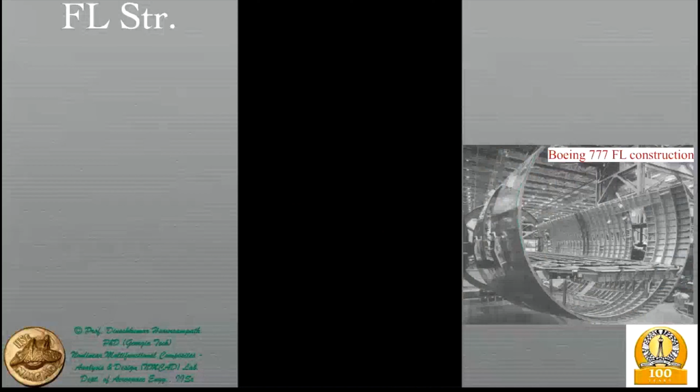Of course, there's the skin all around. It could be a single skin for smaller aircraft, but as aircraft become larger, especially the A380 or the Boeing 777, it's made out of multiple panels joined to each other. Depending upon the material, the joining technology varies. Older technologies were more in terms of countersunk rivets, whereas now it's more adhesive joints and/or rivets in combination. Again, it depends on the specific materials utilized.

In addition to the cover skin, you see elements running along the length, similar to the wing, which we call stringers and longerons here, especially if they run almost through the entire fuselage. Here you see smaller ones, the typical stringers. They need to be cut out, for example in this case because of a door, or somewhere else because of a window. So these stiffening elements running in the longitudinal direction become shorter.

Apart from these longitudinal stiffeners, you have the transverse stiffeners, an example of which is the frame. Some of these frames, especially where the wing is attached, could be much larger compared to other frames because of the larger loads coming in from the wing there. In addition, apart from these frames, you would have much larger transverse stiffeners in the form of pressure bulkheads, typically at the rear and front end of the fuselage. So let's look further.

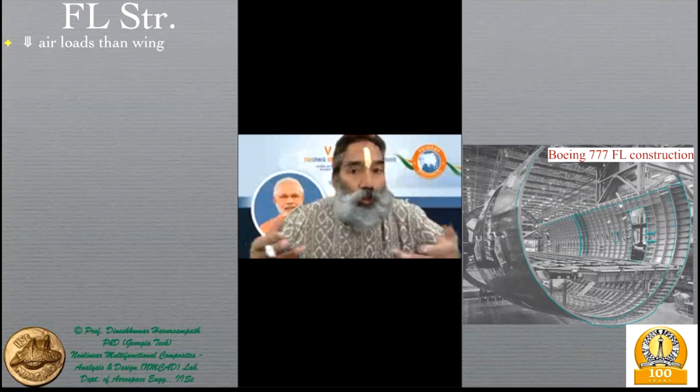It could be in the belly part, the bottom, or the sides, or somewhere on top. Wherever it is, it's basically local air pressure coming in, and there are two sets: one from outside, the other from inside. The inside pressure is substantial, especially for passenger aircraft flying at higher altitudes, as is the case with most commercial aircraft, so that's a substantial load.

The air load from external airflow, because the aircraft is moving through the air, is much smaller than on the aerodynamic surfaces. So the primary loads—the second being internal pressure for passenger aircraft—mean that in terms of geometry, the most efficient configuration is a circular cross-section. As you see with the Boeing 777, it's almost circular, or at least close to an oval configuration in most situations.

But in addition to internal pressure for passenger aircraft, all aircraft have concentrated forces coming from the fairings that attach the wing to the fuselage. In some cases, the wing runs through the cross-section of the fuselage as a single structure; in others, it's joined at a particular location through fairings, which becomes a very critical location.

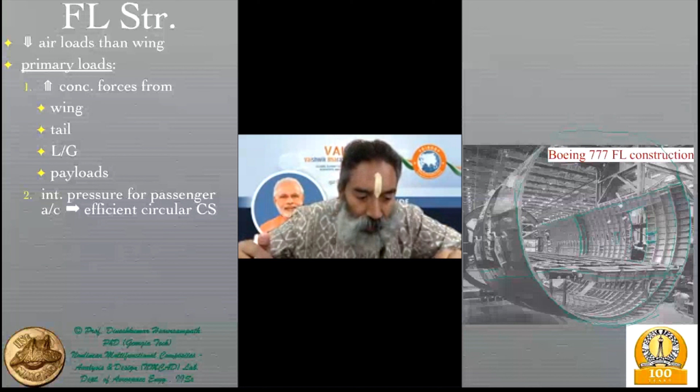As we said, the wing is like a cantilever beam with a distributed load, and at the root it suffers the maximum bending moment and maximum stresses. Therefore, how it's joined to the fuselage is very critical. A concentrated force comes from the wing there, and at the rear end this might just be the central fuselage construction—here you see a much larger frame, probably near where the rear engine is attached, for example.

Not in this case, but in other cases, it could also be where the empennage is attached. You would want that, but of course, there will also be a rear pressure bulkhead at the rear end as well. So from the tail, there would be concentrated forces where the tail is attached to the fuselage.

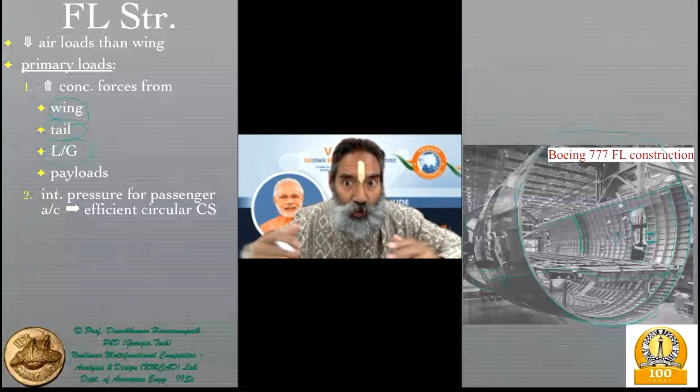In addition, the landing gear, especially the nose landing gear, because the rear landing gears are usually on the wing, unless you have a very small aspect ratio wing and a large fuselage, like going more towards a blended wing body, in which case you would have it on the fuselage as well. But in most situations, you would have the landing gear loads coming both on the wing and on the fuselage. So here we are focusing on the fuselage.

Then, of course, there is a payload on top of this floor beam as far as the people are concerned in a passenger aircraft, but there's also a lot of cargo in the bottom portion over here, and that is also causing a load.

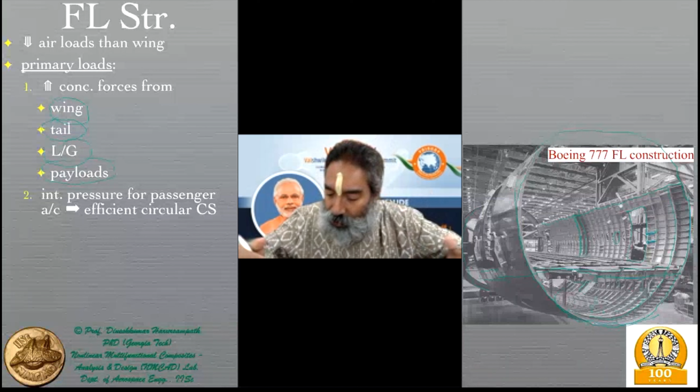So the floor beam is a very important structural component over here, and the choice of materials and geometry becomes important. The geometry is dictated from it being flat for the movement of passengers on top of it and the location of the seats, etc. So in terms of shape, you might not have much change, but where it is located in terms of height, there you would have some leeway.

Again, it depends on maximizing the room for the passengers, at the same time having enough room for the cargo volume to occupy the bottom portion. In addition to the cargo volume, you would have many other connections, electrical connections, control connections, etc., running through below the floor of the fuselage.

So therefore, essentially, we might give names to each one of these in terms of the cover skin, the stringers, longerons, frames, and bulkheads, etc. But essentially, it's nothing but a thin shell, which means it's a 2D element, which we have looked at basically as a shear panel.

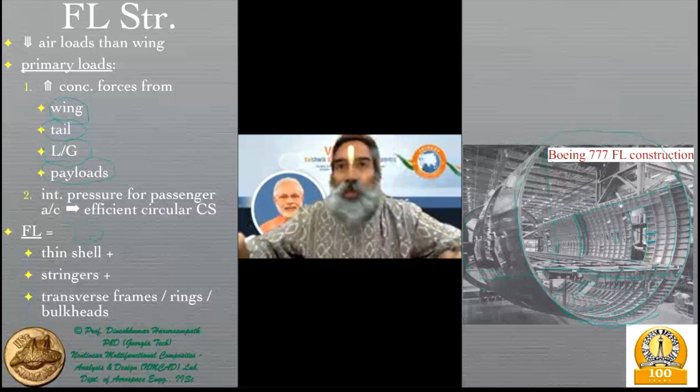So a 2D element, which is your shear thin shell, and then your stringers, which are essentially 1D elements, and the transverse frames are also essentially 1D elements because their cross-sectional dimension is very small compared to the overall length of the frame, which is basically the circumference of the fuselage itself.

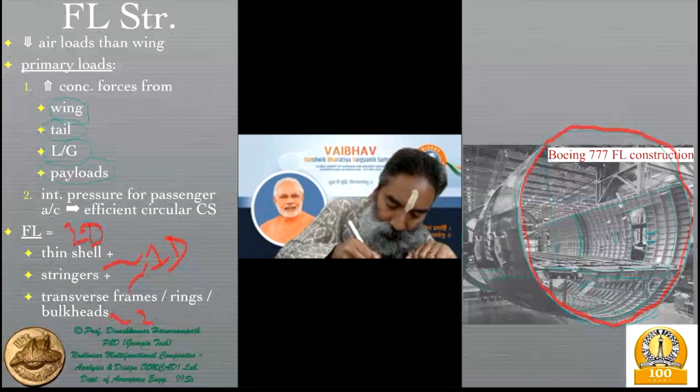But if you look at the bulkheads, they are more in terms of a 2D configuration, very similar to the transverse ribs that you have in the wing and horizontal and vertical tails. So you have two kinds of transverse stiffeners, some of which are 1D, some of which are more like 2D.

So then let's look at each one of these elements. The skin, as you know, carries, just like any other 2D element, predominantly the shear stresses. Again, the shear stresses could be due to multiple reasons. There could be torques. Why could the torque be?

Because let's say there's an engine attached here. The weight of the engine is going to act at a location, or through a center line, which is different from the center line of the fuselage. So there is a moment arm that is there. So this length times the engine weight could be acting on that.

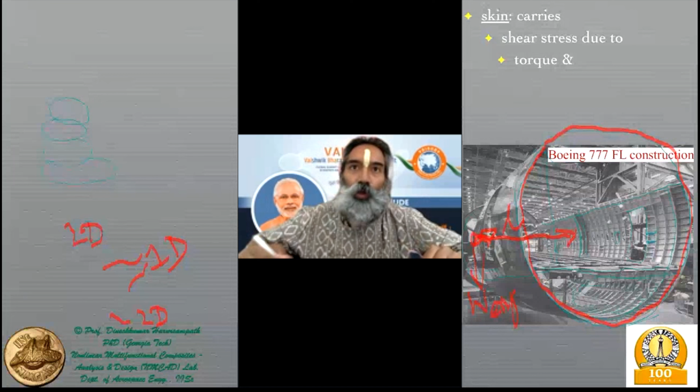Similarly, whatever is the lift distribution which is coming at the fairing over here is again acting at a location away from the center line. So that will cause a torque, but it's not throughout because it's going to be balanced by what is coming from the other wing.

Unless the aircraft is performing a roll maneuver, in which case you would basically put the aileron down on the right side, the starboard side, and on the left side, the port wing, you would have it up, and therefore there is less lift there and more lift on this side. Therefore the starboard goes up and the port side of the wing goes down.

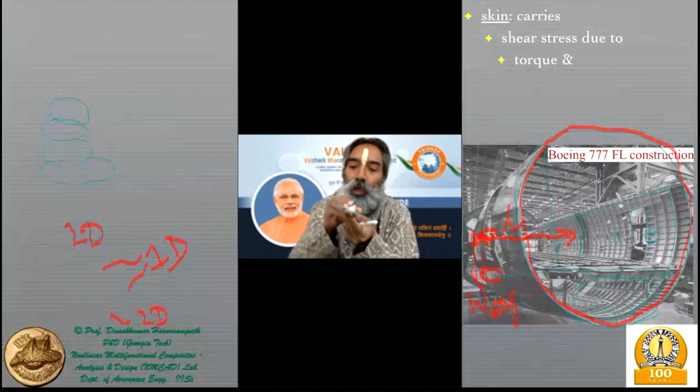This is a nomenclature typically used to distinguish the right side as the starboard and the left side as the port wing. In such situations, you would have a little bit of torque coming from the differential lift transmitted from the wing to the fuselage. But if you look at the horizontal tail, you'd never have a differential there. It's only from the wing that you could have a differential like that.

Also, at least a part of it is experiencing a little bit of torque, because this weight, even when it is a symmetrically loaded structure, causes some kind of transverse shear acting through it, and that transverse shear has to be accounted for in any case. So the second source is the transverse force, and more often than not this is the larger of the two, something that needs to be taken into account even more than the torque. But it's the combination that is important under different flight phases.

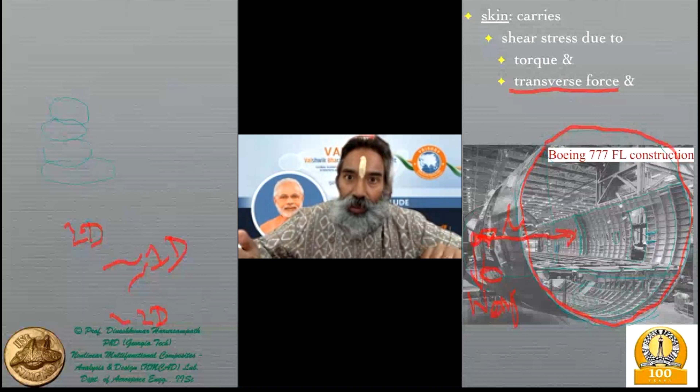Then the skin also takes the hoop stresses due to internal pressure, as in a passenger aircraft flying at higher altitudes where the external ambient pressure is very low. You can't survive at such low pressures, but of course you do not provide atmospheric pressure at sea level, which would be too expensive - one, from the structural point of view, because the design would require a much thicker skin, and also a thicker skin means larger weight and the efficiency of the aircraft comes down.

So typically you will have an internal pressurization at a certain altitude, and again these are specified by the certifying agencies and are strictly followed.

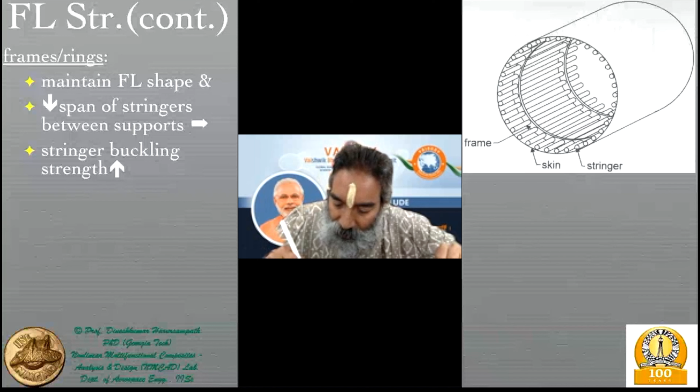Continuing with the fuselage structure, more in the form of a schematic shown in the figure, these are the three main components: the skin, the stringers or longerons, and the frame or bulkhead. We just saw the role of the skin already, so that is taken care of. Now we will look at the frame, ring, or bulkhead.

This essentially performs a function analogous to the transverse ribs in the case of the wing and stabilizers. There it was maintaining the aerodynamic shapes, the airfoil shapes, cross sections. Here it maintains a circular or near-circular cross section of the fuselage, so that the volume or cross-sectional area it's designed for is more or less maintained under all flight phases. So it's to maintain the fuselage shape.

Then it depends on the pitch - the distance between two adjacent frames. Let's call that pitch P. The smaller it is, the more it reduces the span of the stringers, so that even though it might be a longeron running all through, the effective length of consequence is just that P portion of length P.

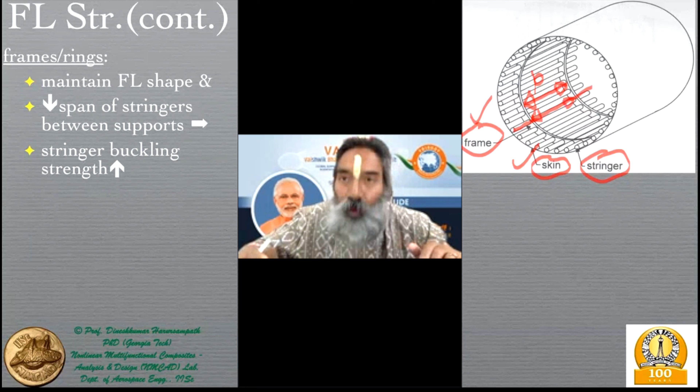So the transverse frames, by their very existence, reduce the span of the stringers between the supports, which means that those under compression - depending on the bending loads coming in, whether it's the overhang portion or the interior portion - the fuselage can be dealt with as a simply supported beam with overhangs on both sides, more on the nose side. Depending on that, mostly because of the self-weight and other loads from the reactions at the two supports - the wing and the tail - you get bending, and so some of these stringers will be under compression.

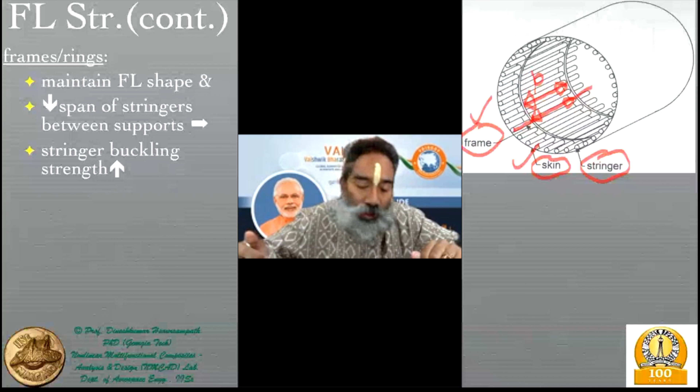So even when the aircraft is on the ground, just from the self-weight, you can see that the stringers on the top will be under tension, whereas the ones at the bottom will be under compression. The situation remains somewhat similar in terms of where the tension and compression is. So you would choose materials which are better in compression in locations known to be prone to compression, and vice versa.

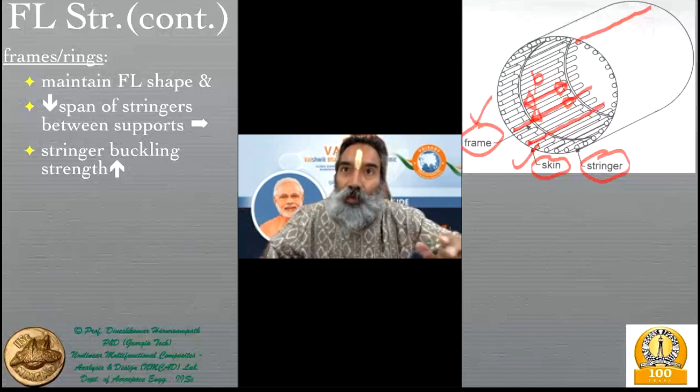The effect of the frame is in terms of increasing the buckling strength of these stringers, and therefore their instability is either postponed or completely avoided. Whereas the skin, even in the case of the fuselage, may sometimes be allowed to operate in the post-buckling regime, but more so in the aerodynamic surfaces than here.

On the other hand, the heavy bulkheads that I talked about, the front and the rear, close to where the cockpit is and close to where the empennage, that is the tails, are. These are typically much heavier, but once again they are transverse stiffeners, and these heavy bulkheads will especially distribute large concentrated forces, and that's why they are located in such locations.

We saw that in the Boeing 777 example, how the frame closer to where the wing is attached is much larger in cross section compared to the regular frames. These will distribute such large concentrated loads, which could be coming from the wing, the nose landing gear, the empennage, or if an engine is attached to the fuselage, as in the podded aircraft that we talked about in the previous class.

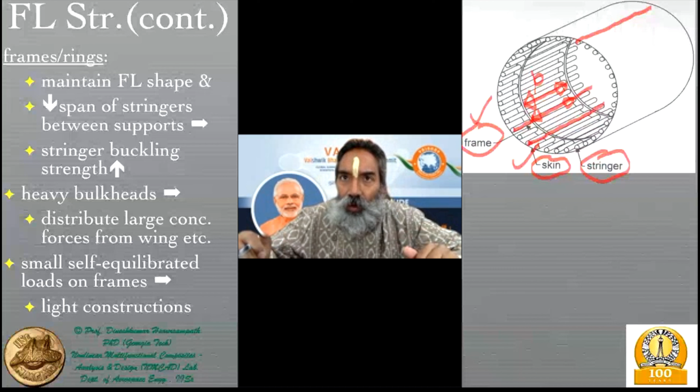In addition, most of the frames, not the bulkheads, are having very small self-equilibrated loads. The whole idea is to get the force or pressure from the air loads transmitted through the skin to the stringer, and from the stringer to the frame, eventually to be transmitted to the floor beam. And of course the reactions, that is the simply supported beam, is having a hinge over here and another hinge over here where the wing and the tail are attached. So it's basically transmitting the load to those locations through the bulkheads or frames that are over those locations.

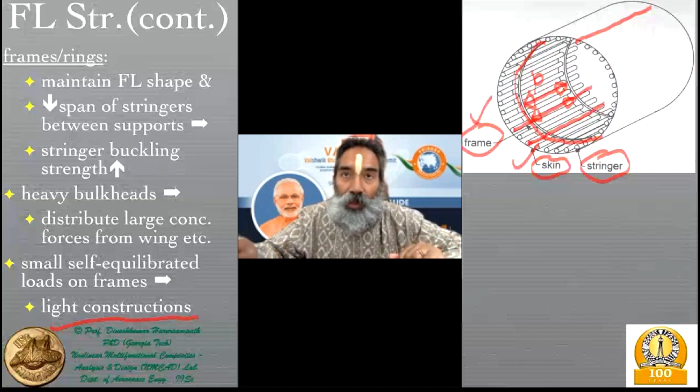Whereas the other frames, the ones you see in this schematic, are usually of a very light construction. In other words, the cross-sectional area is very small, and the material requirements are not as stringent as, for example, in the case of the stringer or the floor beam.

So then the final component over here is, we've already seen the skin and the frame. Now we will take up the stringer or the longeron. These stringers, as is evident in the case of the wing as well as the fuselage, carry the bending moment in the form of axial loads, because each of them is not actually under compression and tension individually to balance the bending moment, but they are operating as a team. Some of the stringers are under compression, some under tension, so that together they carry the bending moment.

So usually when we say a beam is under bending, you expect a neutral axis and portions in tension and compression, but that's not what we are talking about in the case of the stringer. Essentially they are like axial rods, primarily carrying axial forces, some compressive, some tensile.

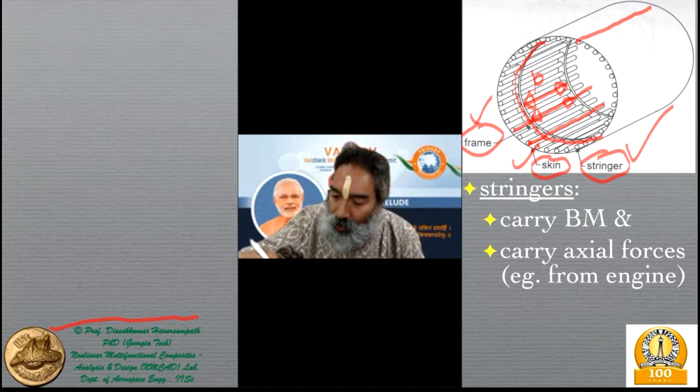And in addition, as we saw in the previous class, in the example of the podded aircraft where you have the engine attached to the fuselage, the thrust of that engine acts like an axial load. If the engine is attached somewhere over here, that thrust is also causing bending if it was just a single engine. But obviously you have engines on both sides, so it's not going to cause bending because of that—both sides compensate each other.

But if there is a single engine failure, which is why multiple engines are required, especially in passenger aircraft including business aircraft where this podded configuration is very common, once one engine is off, the other engine causes a thrust which not only causes an axial load in the stringers but also causes bending for the overall fuselage. Because of that, an additional axial load—algebraically speaking—is cast on the various stringers, depending on which side they are of the engine that is off.

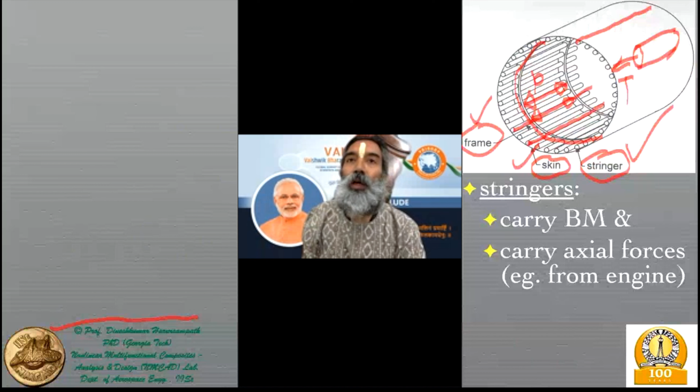So the next purpose of the stringer is also to stabilize the skin. Just like the ribs reduce the skin panel size in that direction, the skin panel size in the circumferential direction is reduced by the pitch of the stringers in the circumferential direction—that is, how far apart the stringers are.

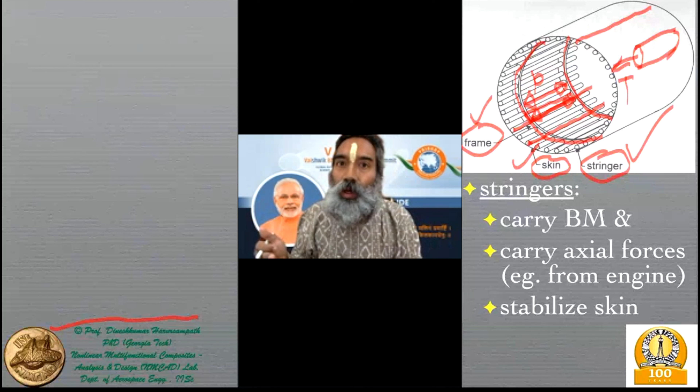That creates a small strip-like panel, which is what essentially takes the load, because once it crosses a stringer, it's able to transfer its air loads onto that stringer. So you don't need to consider the entire wing panel or fuselage skin, just that part of the panel between them. And that's why in many situations you can even have closed form analytical solutions which might work reasonably well, if you have, of course, estimated the loads with reasonable accuracy.

With this, we have completed our understanding of load factors, wherein we saw how the inertial loads in terms of the G factors, how many Gs the aircraft is flying at, versus the velocity, because that dictates the dynamic pressure. So we saw the critical design points on the flight envelope for which the aircraft needs to be designed. That was the flight envelope or load factor study, and then we saw the load transfer as well.

Now that we have done that, we have looked at pretty much all the fundamentals of the flight vehicle structure. So in the rest of today's class, we'll revisit the aircraft materials that we have already encountered earlier, and see what additional information we can make based on the classes we have had recently. Once we are done with that, we will get into the theory of elasticity, because we know we have chosen the material, we know what kind of structures they are, some 1D, some 2D. How do you go about analyzing them?

For that, we will set up the terminology and also put it into that bigger picture we formed of 4 categories of variables, namely loads, stresses, strains, and deformation, and the 3 sets of equations which relate them, namely the stress equilibrium equations, the constitutive law, and the kinematics, which relate pairs of these. Putting them all together, we arrived at either a 4x4 matrix, which is good enough, or if you want to compare with results of others, you can go for a 6x6 matrix, as we said.

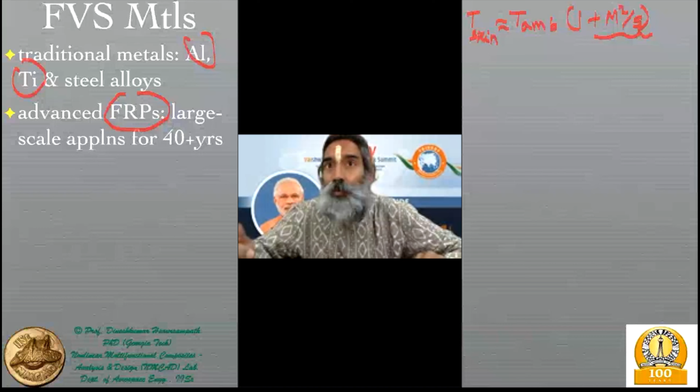Overall, the classic example is the SR-71. Another example is the Boeing 787, which went into huge time overruns. It's a hugely successful aircraft today, but in terms of deadlines it never met them, and in terms of cost of development it far exceeded initial estimates. Why? Because of the new technologies.

One is, of course, the composite materials that were involved in a much more extensive way. So here we are not only talking about development in terms of production and manufacture, even more so in terms of the maintainability, serviceability, and repairability. All these issues need to be taken into account when talking of materials.

It's essential that since these materials have been around for so long, we understand, even in the case of fiber reinforced plastics, the various issues associated with them. The typical life is about 30 years, even for commercial aircraft, so many FRP components might have already overrun that, requiring replacement and recycling. With polymers, especially the thermoset polymers predominantly used, lately there's been a movement towards thermoplastics, which could be a little better at recycling. So what are the recycling issues there?

If a crack or damage develops and a portion needs to be repaired, composite patch repairs are needed. At the damaged composite location, you typically cut out the area to have a more uniform shape, oval or circular, and then put a patch over it. Now, if that patch is too stiff or too less stiff, both can create problems because of the stiffness mismatch, and stress concentrations could arise there.

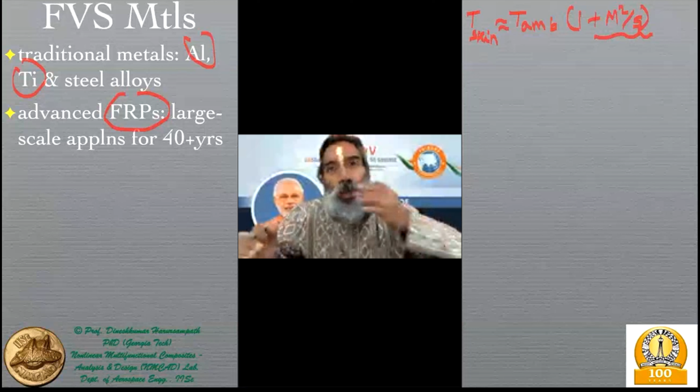Understanding all of these aspects, at least from a qualitative point of view, is required for all aerospace engineers, whether we specialize in materials and structures or not. This overall understanding is what I'm trying to provide through the information I'm sharing here. For those interested in pursuing it further, there are many different sources through which you can do so. The material selection criteria will depend on various things.

We have talked already about three very classic ones: specific strength, stiffness, and stability. Those are primarily looking at structural performance, but we need to look at cost as well. That's where you have the various kinds of cost - initial material cost as well as manufacturing cost, which includes various ways of manufacturing and joining it, because the entire aircraft is never made as a whole. You have so many parts which need to be joined, so those joining costs, and eventually the maintenance service costs.

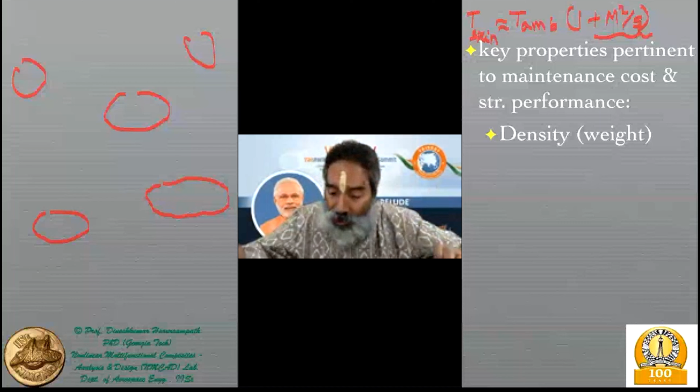So the key properties pertinent to maintenance cost and structural performance are these. One, of course, we have already seen density, weight. For example, even toughness - toughness is typically defined as the area under the stress strain curve. So if you have the stress, let me just do this: stress versus strain, let's say in tension, sigma 11 versus gamma 11, the 3D strains we're talking about.

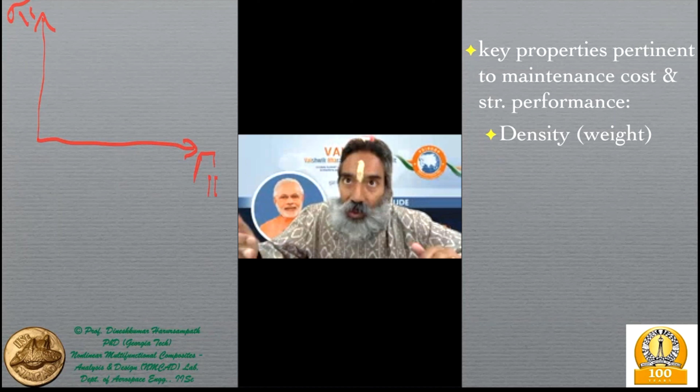Therefore, it's a property only of the material. Whereas when we're talking about the stress resultants, it becomes a property of both the material as well as the geometry. So here it's a purely material property.

We know for various materials like composites, it could be brittle - it's just a fracture over there. So we are basically talking of the area under this curve, whereas for others which have a nonlinear portion, yield, and then could have strain hardening in terms of true stress, and in terms of apparent stress the stress level comes down. But essentially what we are seeing is at some point there is a failure, and whatever is the area under that curve is giving you the energy per unit volume.

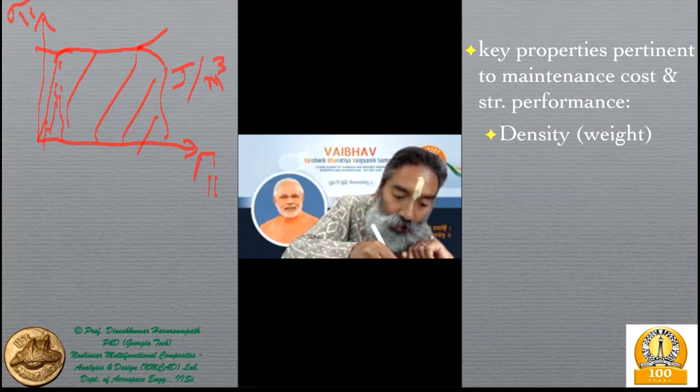But again, it's not that which is critical for us. In that case, you have to divide by the density again, just like we did for the specific strength, the specific stiffness which is the slope of this curve, and also in terms of stability, the E by rho cube that we talked about. So in all those cases, there was a division by density or some power of density involved.

Similarly, in terms of toughness also, this gives the amount of energy stored per unit volume. But again, what you are interested in mostly is energy per unit mass. So you would have to divide that area, whatever area is there, by rho in order to get the fracture toughness in a per unit mass kind of thing. Because for a unit mass of weight that you're using - that's the weight penalty we're talking about - how much energy is it able to store, more from the point of view up to fracture.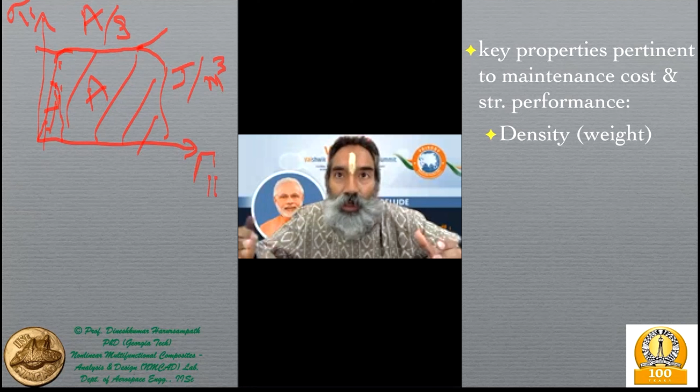So therefore, in components which are designed to absorb those energies, just like in the case of a car, you have the bumper and front portions which are supposed to deform in order to absorb the energy of the impact. Similarly, in the engine, you have a containment structure that needs to absorb the energy. So these kinds of things need to be designed from a per unit mass basis rather than just this area alone. So do keep this in mind that A by rho becomes a critical thing. Density is not only important from those three parameters we already studied, but this is another example where density could play a role.

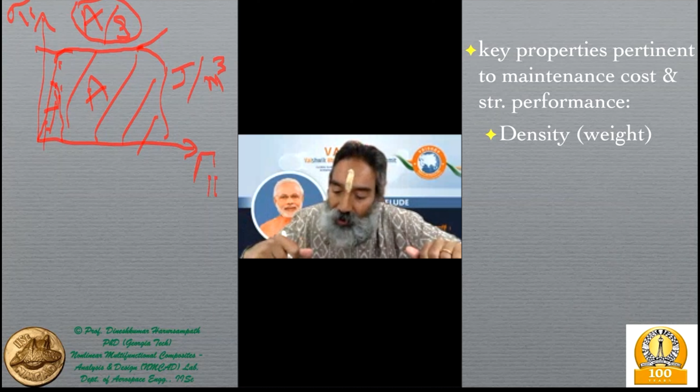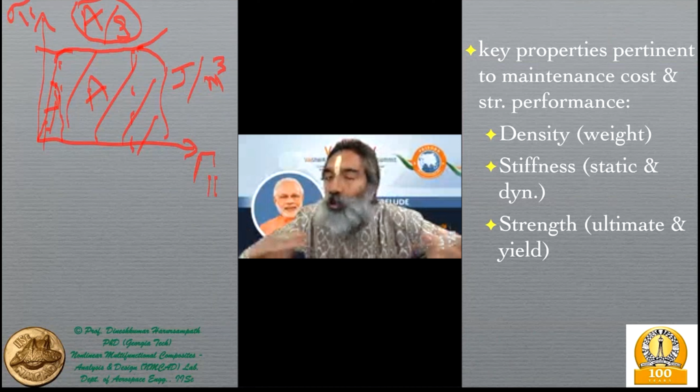Then coming to stiffness, again, we talked about the static and dynamic stiffness - one in which there is no square root, the other in which there is a square root that is important - and then specific strength as well. And there, again, ultimate as well as yield, because once it has yielded, there is a possibility of permanent deformation. It might be okay for that particular flight if it's a ductile material like what we showed in this particular case, where it has a very large strain at which the hardening starts happening. So there you might be okay for that particular flight, and you can probably repair it.

But overall, you do not want any permanent deformations to set in. So many times the yield will become important in those kinds of materials which do have a yield point. But there are many materials, including metals like aluminum alloys, that sometimes do not have a very well-defined yield.

And so you define something called a proof stress, which is about 0.2% or 0.1% permanent deformation, in order to understand it in relation to steel alloys that most people are familiar with.

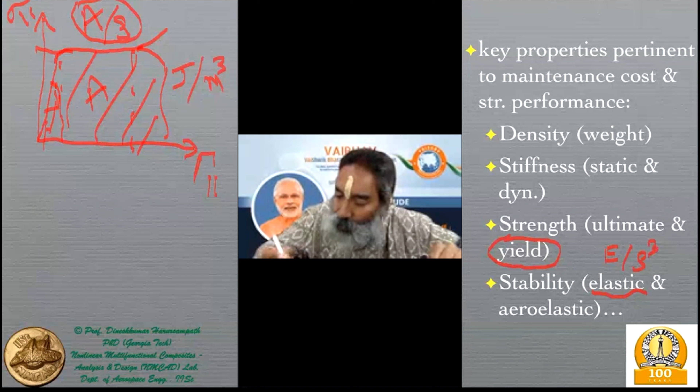And then, of course, stability. What we already encountered in the earlier class was the elastic stability, which is measured by the material performance parameter E by rho cube. But there's also the aeroelastic stability that we need to take care of. Again, in this case also, just like static and dynamic stiffness, in the aeroelastic case we have static and dynamic stability.

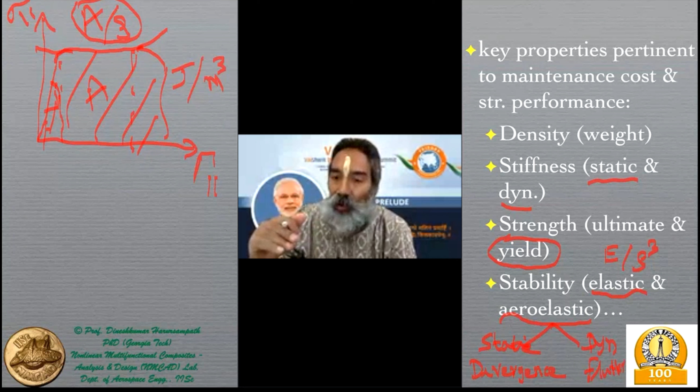Examples of which are airfoil divergence and flutter. I'm not sure if we'll have enough time to cover many of these things, but they do need to be taken into account as well. There, the material properties apart from the geometry play a very critical role—more so the geometry, because these are associated with aerodynamic deformations and therefore aerodynamic characteristics.

So the change in shape and size can make a huge impact, even more so than in the case of elastic stability, where the length of the column etc. can also play a very big role. Continuing, there are a few more key properties pertinent especially to maintenance cost and structural performance, more in terms of the life cycle that I talked about—typically 30 years for commercial aircraft, could vary quite a bit for other kinds of aircraft, let's say fighters or helicopters, etc.

So the key properties—sometimes there are also age extension programs, so you want to see aging aircraft, how you can have a life extension. In such situations it becomes even more critical to consider some of these things, because the aircraft has been under various stress histories, and those can start contributing. Whereas in a pure elastic model with all those assumptions we talked about, we are not taking into consideration all of that, saying the stress is dependent only on the strain at a given point of time, at a given location.

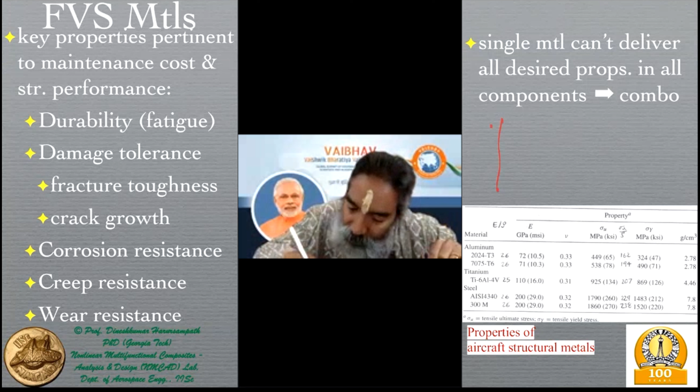So that's not the case—the histories could matter. One such example is fatigue, where we know that the strength could typically, if you plot strength versus the number of cycles of loads it has gone through, show some kind of decrease, and that could be quite drastic. Depending upon the particular component, the level of stress amplitude variations you have, and the frequency at which it varies, etc., all of that is going to dictate how much the strength is going to drop by.

So durability is very important in understanding fatigue, and that may not be directly evident from those three performance parameters we have already seen, namely sigma u by rho, E by rho, and E by rho cube—they're not going to tell you the whole story. The fracture toughness, which is the energy stored, also won't tell you the whole story. This is an entirely new thing.

And the tests involved here could take a very long period of time, because the number of cycles involved are in tens of thousands. For new materials you're developing, you don't have the data for that—it gets developed over a period of time. Whereas for traditional materials, you have lots of data related to that which you can utilize. So that is one thing we need to ensure.

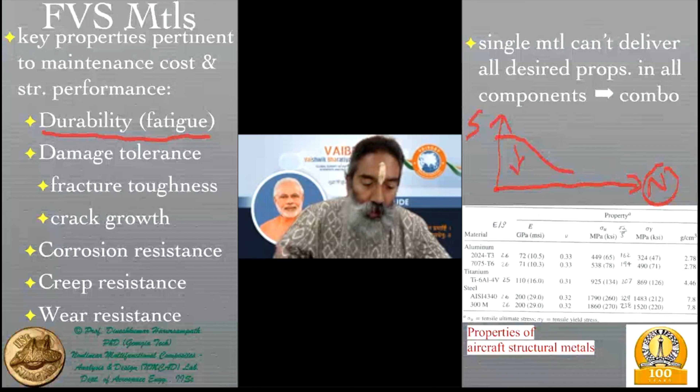The other thing is in terms of damage tolerance. However well you design, you cannot completely avoid damage—there is going to be some damage somewhere or the other. It's similar to a human body: however well your diet, exercise regimen, or sleeping habits might be, irrespective of that you might encounter certain issues. Similarly, all materials will encounter certain issues.

Once there is a crack, depending upon its size, location, and what kind of loads that component is undergoing, over a period of time that crack starts growing. Damage tolerance is about ensuring crack growth rates are as small as possible, and not detrimental to the overall life of that structural component and of the aircraft as a whole. There, fracture toughness plays a very critical role, which we saw in the previous slide.

But in addition, the crack growth rates play a very important role. There's something called the Paris law as the simplest model. When you go to composites, etc., you go for more generalized, more complicated versions of that, which are more reliable. So essentially we need to account for these aspects.

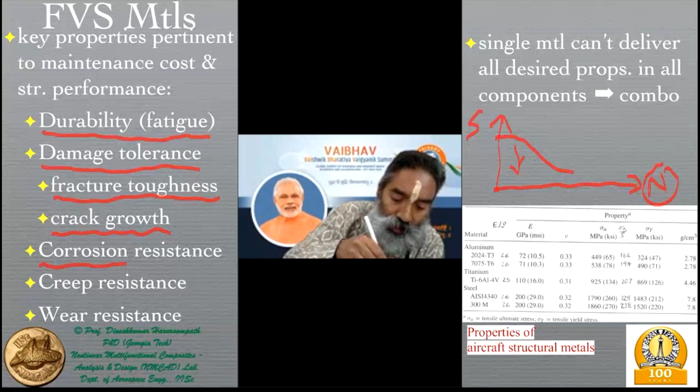The second issue is material failure versus the potential of crack growth. The third is corrosion, because most of these are in environments exposed to the atmosphere, which means moisture. If it's a naval aircraft operating with the navies, it lands on ships and carriers, and then you have salt water, the marine kind of corrosion that could exist.

Again, you're using multiple materials, and these multiple materials could have different electromotive force potentials. Some materials could be more anodic in nature, some more cathodic. If these two materials are joined to each other, or the fitting used to join them, like a rivet or bolt, happens to be of a material far away in the electromotive force potential—what we call the galvanic list or electrochemical list—they're farther apart in terms of voltages.

So then the possibility of galvanic corrosion arises. In addition to galvanic corrosion between materials, a single material itself can have this issue because of its alloying elements. For example, copper could have electromotive force very different from aluminium, and aluminium-copper is the most common material used in 24ST or AL 2024 kind of alloys. So is there a possibility of galvanic corrosion arising there, and at what length scale it originates? These are things you need to be familiar with.

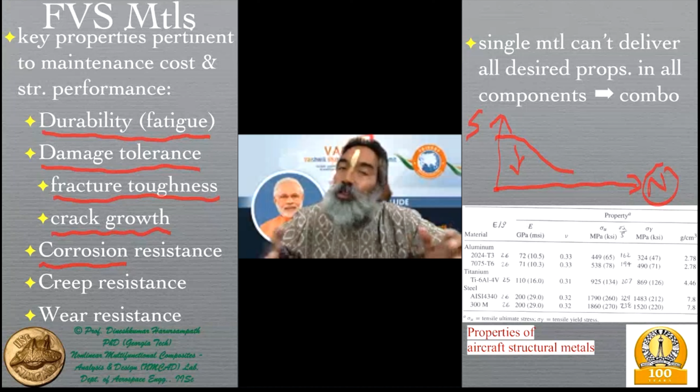In addition, some of these parts, let's say on the wing where the fuel tank is, and where fuel is filled from an external tank on the ground or in flight, some fuel could spill on the aircraft. So what is the corrosion related to that? There could also be battery leakages—typical lead acid kind of battery, or any other liquid-state battery rather than solid state like lithium ion—so there you could have these materials causing certain corrosion.

You have lubricants used during service procedures, so maintenance engineers, mechanics, or technicians spill some of it, and that could cause corrosion as well. Even the toilets inside a passenger aircraft—any leakage there could cause a certain level of corrosion in some structural components, depending upon where it reaches and what materials those are made of. So all of that kind of corrosion we need to look at.

The third kind of corrosion is stress corrosion. Corrosion by itself is bad, but in a stressed component, the way it reacts to corrosion is even worse. So it's already under mechanical stress, and then corrosion comes upon it. Especially if the stress is fatigue kind of, or cyclic loading, then it is possible that those cracks can start growing.

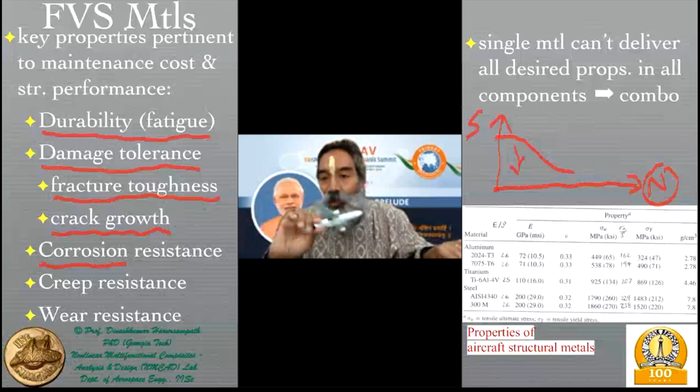For example, in aluminium alloys there's a blessing in disguise: aluminium reacts with oxygen, forming aluminium oxide—in fact it's originally extracted from aluminium oxide as an ore. That aluminium oxide can form a coating that prevents the rest of the aluminium from degrading or corroding. But if a crack happens in that coating, especially in an element loaded in fatigue, like vibrations from the engine due to changes in lift distribution, or compressive-tensile load on the skin, all these can cause fatigue. So you have it made out of aluminium alloy, with the aluminium oxide or pure aluminium coating there to protect it.

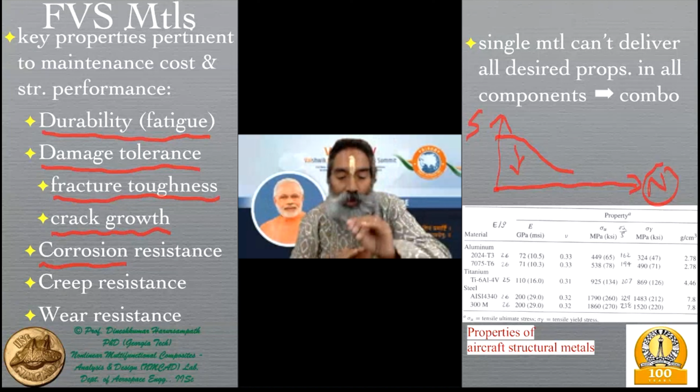But once the fatigue load is there, those coatings can crack. And once the coating cracks, oxygen from the ambient air can seep through those cracks and cause further oxidation of the interior. This can continue further and create major issues for the aircraft. So stress corrosion is a very important thing. The ability of materials to resist this varies, and you need to ensure that the materials you deal with are capable of handling that.

Steel is also highly prone to corrosion. That's why you have stainless steel, for example, but the mechanical properties of those are very, very small. So when you're trying to increase certain things, others come down.

For example, in the aluminium alloys, the initial utilization was mostly in the 2000 series, 2024, what we call 24ST. But later on we moved to the 7000 series where we added zinc in addition to whatever was already there. But that zinc caused certain corrosions, and that became a major issue. In addition, the fatigue properties were much less superior compared to what you already had. So these are things that give or take when you move to better alloys, so you need to understand.

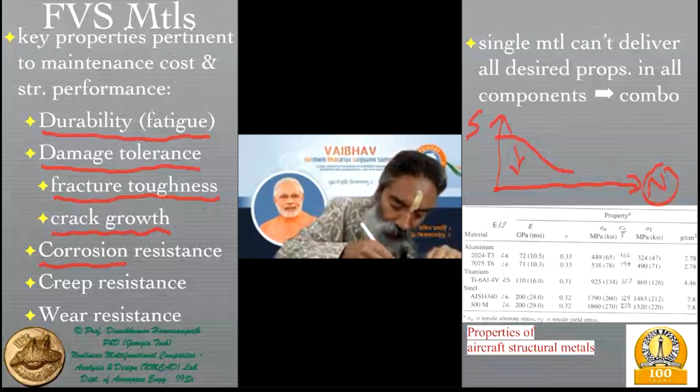So corrosion has to be taken care of. Next is creep. I think we mentioned this in passing sometime earlier. The idea is that certain materials, even under static loads, even if that load is not causing a stress beyond the yield point of that material, if that load exists for a very long period of time, over time there's a permanent deformation which sets in, in spite of not yielding.

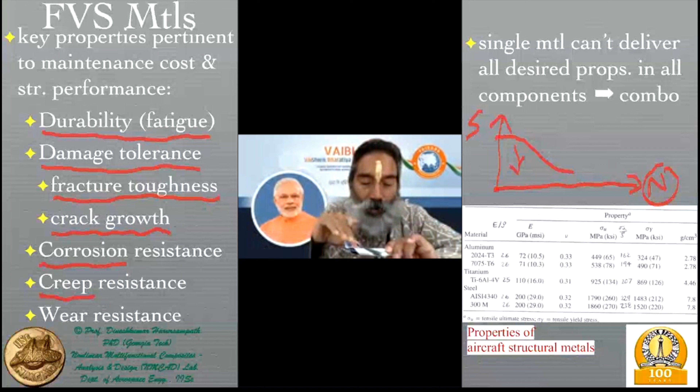So that is basically creep. The opposite of that is the stress relaxation we talked about earlier, which is actually beneficial. But here, creep can become an issue. During the manufacturing and joining processes, we should ensure that the stresses built into the structure are not going to be harmful in terms of developing such creep. Creep resistance will vary from material to material, so the choice of material in components more prone to creep will have to be addressed.

For example, commercial aircraft will keep taking off and landing, within a day performing so many sorties. So their time on the ground, yes, in the overall life cycle it's almost 23 years out of the 30 years, but at least they are going through these cycles.

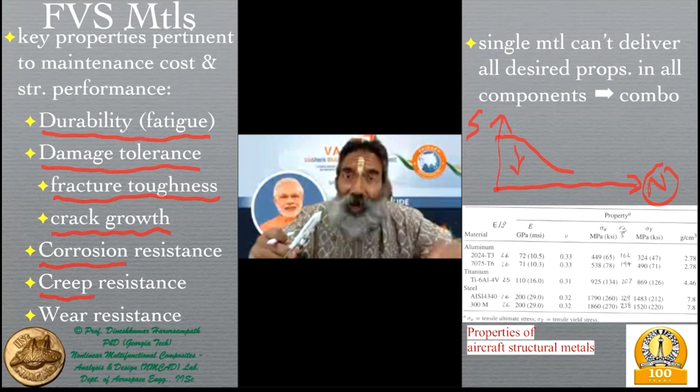But there might be certain aircraft which are bought, like for example, aircraft that many of you tech students have not seen, but if you come to the aerospace department we have two old aircraft parked over there, or even regular aircraft of smaller size may not be flown as frequently. Even business aircraft may not be flown very frequently. So these are on the ground for a long period of time.

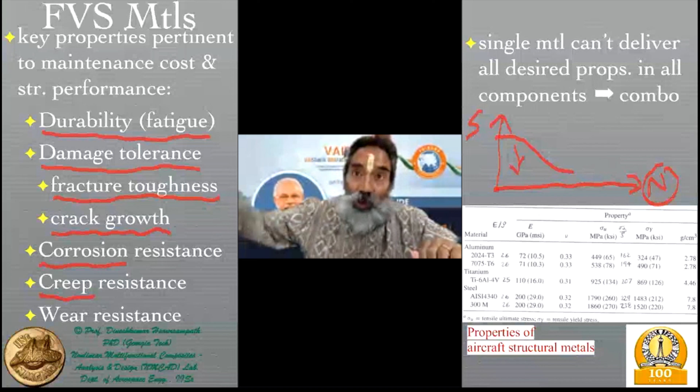So the landing gear, for example, is continuously stressed under compression. And if you use a material subject to creep there, it could have permanent deformation happening. That permanent deformation could sometimes be quite disastrous, especially when the aircraft is landing, or sometimes even during takeoff, especially if there is an imbalance of one undergoing more than the other. So creep is something that we need to take into account.

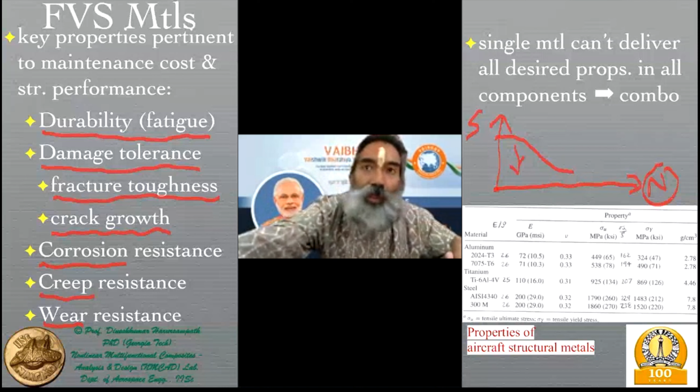The last thing is wear resistance. I mentioned this in a previous class when talking about leading edge caps. In many advanced aircraft you would have aluminum caps, just like in the helicopter rotor blades I explained before, a steel cap for the leading edge. Even if you look at the leading edge of aircraft like the A350 or the 787, which are made out of entirely composites, mostly the primary load bearing structures, we still see metallic materials used there because you do not want wear, especially when it is being cleaned, etc.

And also, while we are at the leading edge of the aerodynamic surfaces, the nose of the fuselage, the nose cone as we call it, again is typically a very different material from the rest of the aircraft.

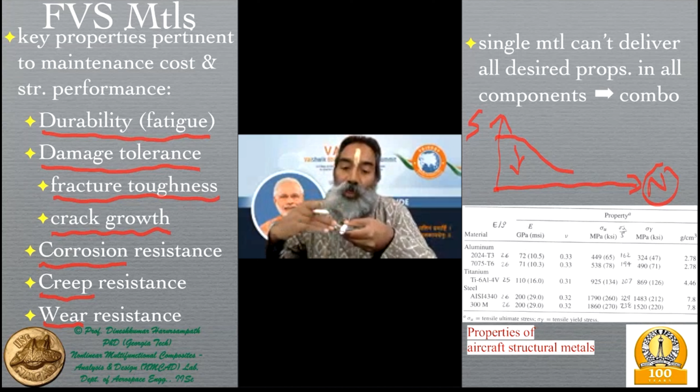It's understandable that the cockpit canopy of fighter aircraft as well as transport aircraft is made out of acrylic or some other bulletproof material which is transparent. But even the nose has to be made of a different material.

For example, some Airbus aircraft and some Boeing aircraft also, you could have most of the aircraft being made out of CFRP, but the nose cone is made out of quartz fiber reinforced plastic, because the signals from the ATC and other aircraft are coming through electromagnetic waves, and you want some material which is kind of transparent to that, so that it seeps into the aircraft and the pilot gets the information fast enough. So you would have certain very different materials.

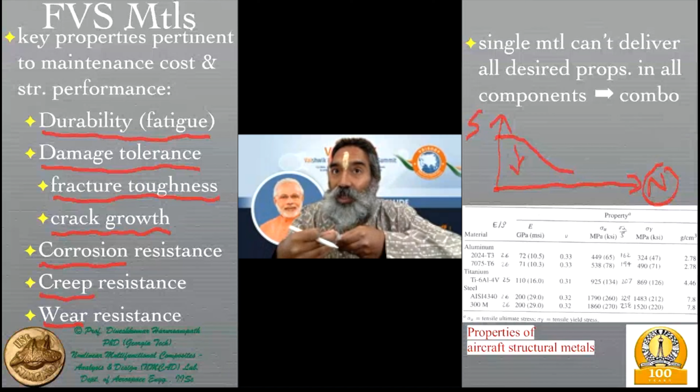So it may not always be from a structural point of view. There might be non-structural requirements like electromagnetic requirements, which again, in the case of stealth aircraft etc., is an entirely different ball game.

So it's quite obvious from all these requirements that we have seen in this slide as well as in the previous slide, in terms of specific strength, stiffness, stability etc., a single material cannot deliver all of the desired properties, and therefore you need a combination. One is in the form of alloys, another is in the form of composites, fiber and matrix, and then a hybridization of multiple different composites, composites along with alloys, many different types of alloys, because each component requirement is different. And then you have the problem with galvanic corrosion because of two different materials coming together.

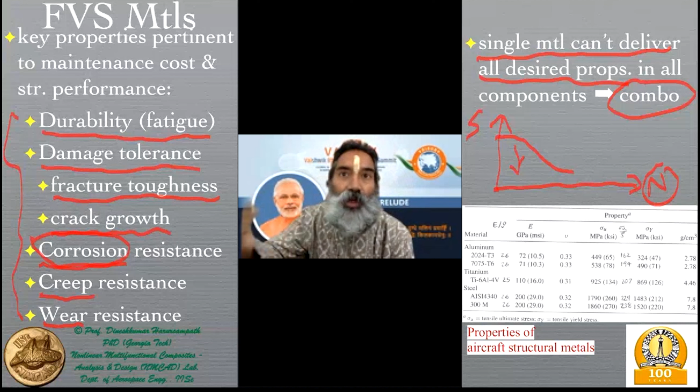Like even in a bimetallic strip, keeping it in corrosive environments, we can show that there can be galvanic corrosion if there's a huge difference in the EMFs over there. So all of those come into picture.

This table we have already seen previously from your textbook. So in terms of E by rho for these materials, there's hardly any difference. In terms of sigma U by rho, there is some small difference, but not something really worth considering. But it's only the E by rho cube which makes a huge difference, and many other parameters that we saw make a huge difference as well, and also the thermal capabilities, whereby these materials could be quite different. For example, titanium could be much better performing compared to aluminium, and steel could be much better performing compared to aluminium for higher temperature applications.

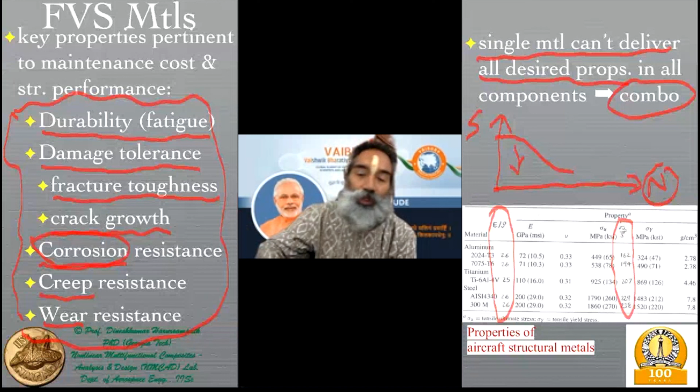So these are properties of the aircraft structural materials. Now we go on to each one of them. Some of these we have already looked at, so we are kind of revisiting that.

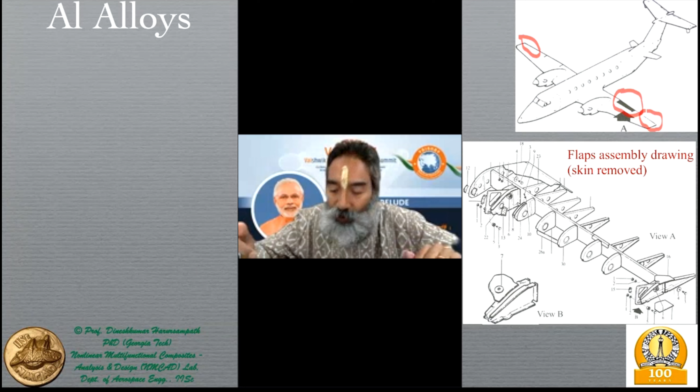So here you see an example of a flap. The same flap, if it's in the outboard, it would be an aileron, which would be deflected differentially on the two sides, the port and the starboard. But here it's a flap. In many situations you had a flaperon to maximize your lift, especially under takeoff and landing, where you want very large lift coefficients. You might use the aileron also non-differentially, that is in a symmetric deflection, and you have what is known as a flaperon kind of configuration.

And then you would have seen many aircraft, especially the larger aircraft, have these pods. So many new aerospace engineering students are wondering what these pods could be. These pods typically contain the actuator and the actuating path for the control surfaces.

So because the flaps are over here, the ailerons over here, these are massive, and the kind of loads that they encounter when they are deployed downwards or retracted back to their original position, could be massive loads. So the transfer of that actuation from the pilot's controls, in this case basically the roll, in the case of the aileron etc., you're basically moving the control stick or the wheel to the left or the right. So you're basically delivering a very large actuation force or moment to these.

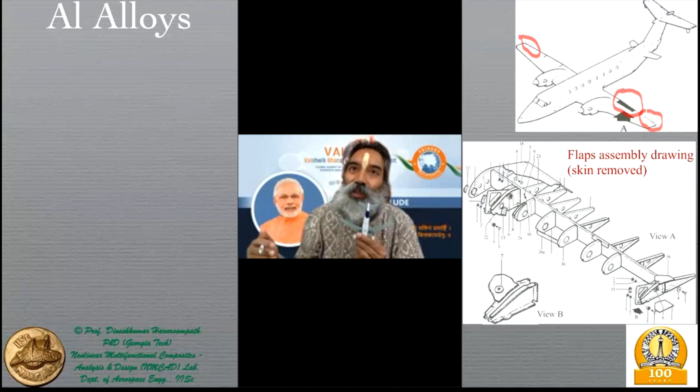And so therefore, you need to contain all of that actuating elements and the flow of that control law. Which is why most of these pods are there, even though from an aerodynamic point of view, they are a disaster because they can increase the drag. But that's the reason why you have them covered rather than exposed as just actuators, in which case the drag would be worse.

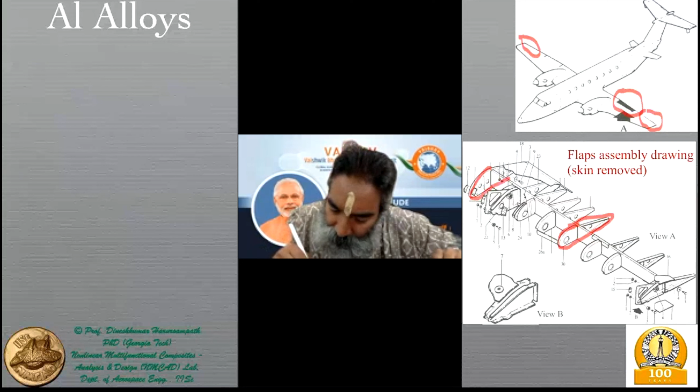Here you see also the rib cross sections, which become smaller and smaller as you go towards the end, to maintain the shape. This is an example of a single spar configuration, but most larger aircraft would have multiple spars.

In this case, you see a T-tail, which I talked about in the previous class, even though the engines are not mounted on the fuselage but on the wings, close to the fuselage, so you would want to avoid that. But here you see there is a small split happening in the horizontal stabilizer. In some cases you would have a canard configuration in the front as well.

So all of those are aerodynamic and flight dynamics realms. I won't delve too much into that.

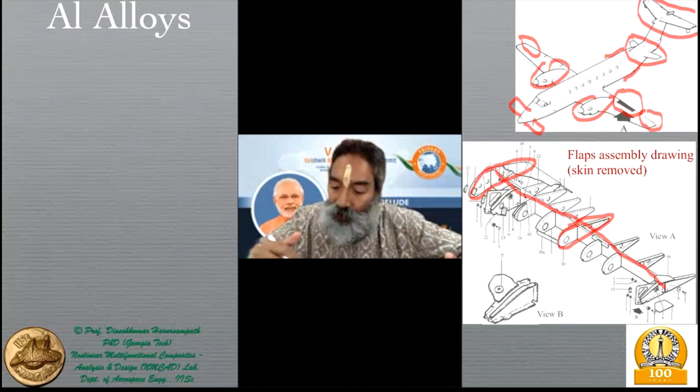But these have implications for the structural engineer, even the materials engineer, in terms of choice of materials, because where components are located dictates what kind of loads they are exposed to, and over what time histories, and therefore how you need to choose the material which is best capable of handling that, while still being reasonably cost effective, available in large quantities for the number of aircraft you want to manufacture, and serviceable over its lifetime for spare parts, etc.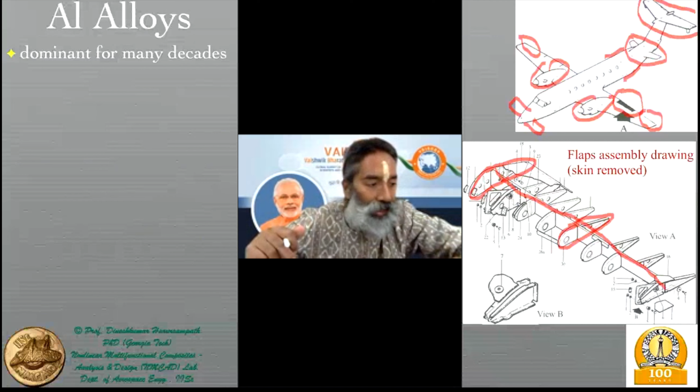So aluminium alloys have been dominant for many decades, offering very good mechanical properties with low density, all the way up to 175 degrees centigrade, which is good enough for subsonic and even transonic aircraft. But when you go for supersonic aircraft, even Mach 2, the temperature scales with Mach squared, or for hypersonic planes, this is obviously not good enough. So you need to make certain changes, either in the material or by bringing in certain coatings, to handle those larger temperatures.

But for most aircraft it is good enough, and therefore the 2024, also called duralumin. The reason for this name relates to its durability and also its hardening process. The alloy which was most common, apart from bronze, which is more than 5,000 years old and made of copper and tin, were the steel alloys.

The steel is mostly carbon added to increase the strength of the iron, with other elements added for various purposes. The way steel was hardened was very different, involving a quenching process, which is very fast cooling after heat treatment.

In the early 20th century, about 100 years back, an experiment was done to try the same kind of heat treatment process used for steel alloys on aluminium alloys, and actually the strength came down drastically.

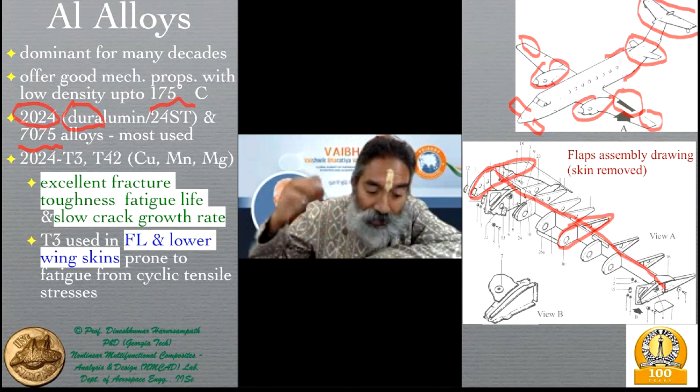The more long-lasting convention we introduced is the 1000 series naming system. In this case, the 2000 series, 2024, sometimes also called 24ST. Since its strength was not sufficient in spite of age hardening, we introduced the 7075, where the additional element was zinc, by reducing the amount of copper used to alloy the 2024. These two, 2024 and 7075, are the ones mostly used, especially in aircraft made in the last century and the first decade of this century.

Whereas in this decade, from 2010 to 2020, many new aircraft have seen many different aluminium alloys being utilized over and above those used earlier.

So again, within the 2024 designation, there could be various heat treatment processes. I'm not very familiar with the codes, but T3 and T42 are examples of heat treatment processes, so whatever number follows T refers to that particular heat process. The code 2024 itself means that apart from aluminium, the primary element of this alloy, the other three secondary elements are copper, manganese, and magnesium.

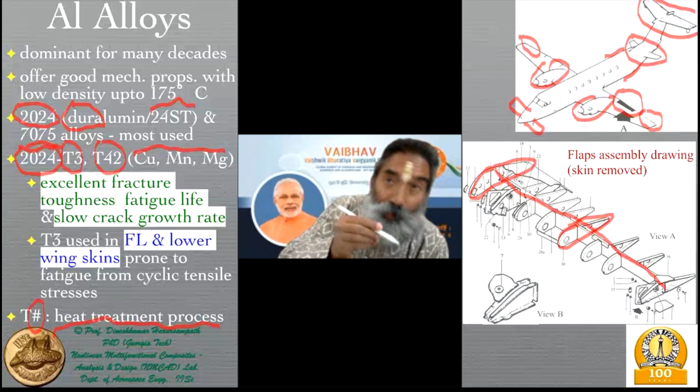Copper being the lead element, and manganese and magnesium in that order being slightly lesser in percentages, all less than 10%, typically around 5%, 2%, etc. What copper does is change the crystalline structure, the grain structure, etc., compared to the original pure aluminium, the 1000 series, which is basically 99% aluminium and only about 1% other elements, mostly impurities not yet removed. Those have certain applications, but from a structural point of view, they're not good enough.

Moving from that to introduction of copper in particular resulted in excellent fracture toughness, fatigue life, and slow crack growth rate, all of which we saw in the previous slide as determining factors for this material. This is the T3 heat treatment, for example, the aluminium alloy 2024, which results from that, and is used typically in the fuselage and also the lower wing skins.

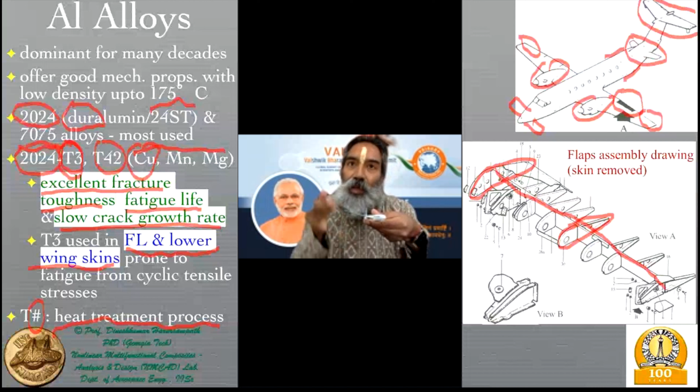The major load on the wing is the lift, which causes bending upwards, and therefore the lower wing skin is going to have tension. So compression is not an issue there, and the tension is varying. When it comes to the ground, it bends downwards, but with a very small amount of compression, which is not very critical at all. So essentially, it is having a fatigue which is predominantly tensile.

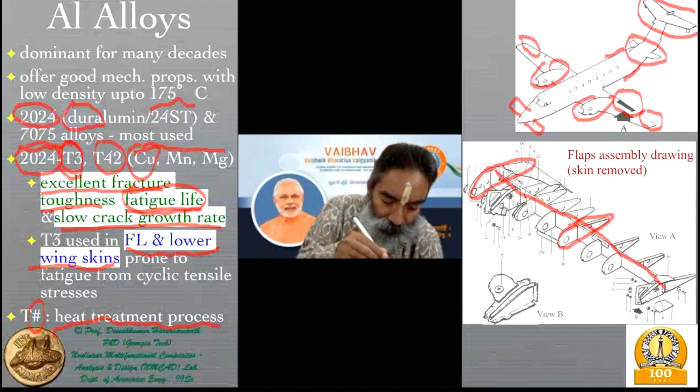That's what the lower skin and the lower stringers experience. So the lower wing skins and to some extent the lower skin stringers can be made out of this 2024 T3 because of these properties - especially very high fatigue life, excellent fracture toughness, and slow crack growth. These lower wing skins and the entire fuselage are prone to a lot of fatigue, mostly tensile, and therefore you tend to use this particular material.

One more slide and I will end today's class, continuing on aluminium alloys. The other most commonly used aluminium alloy in the aerospace industry has been the 7000 series, and in the 7000 series there have been many alloys used, but the one mostly used is the 7075. Again, you have two different heat treatment processes which are common, but in all 7075s, copper is relegated to a secondary alloying element of lesser importance - it's zinc which is in a slightly larger percentage, like copper was in the 2000 series.

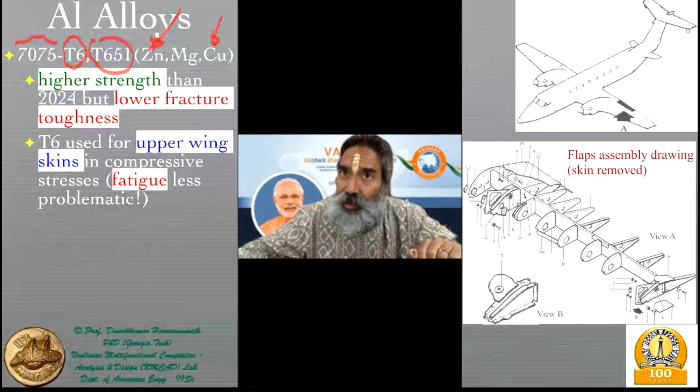What zinc does here is increase the strength much more. So on the stress strain curve, it goes to a much larger value of strength before it undergoes failure - the ultimate tensile strength is going to be much larger. The proof strength, since it doesn't have any yield strength, is also going to be very large compared to the 2000 series. But the introduction of zinc more than copper creates certain problems as well.

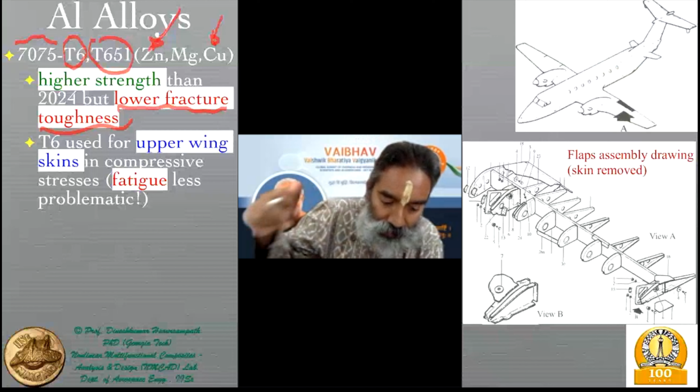It has a higher strength than 2024, but it has a lower fracture toughness. So using it in the under part of the wing skin, as well as the stringers on the bottom surface of the wing and fuselage, is usually very rare - you would not want that because of the lower fracture toughness from the introduction of zinc. On the other hand, this particular heat treatment is used for the upper wing skin, where, as we know, it's predominantly under compression.

It has a very small amount of tension when it comes to the ground because of the self weight of the wing, but that's not a critical load. The critical load is the compression, and there you want very large compressive strengths, which is what the 7075 provides - large compressive strength apart from tensile strength, which is why you use that. So fatigue is not much of a problem where the dominant load is compression.

It's only when the dominant load is tension that it creates those problems. For example, I talked to you about the coating of aluminium oxide that forms, which gets a crack, and further corrosion can happen. So not only from a corrosion point of view for crack growth, but even the purely mechanical crack growth would be an issue only when it is under tension.

The top surface of the wing, both the cover skin as well as the stringers on top, are predominantly under compression, and therefore you want a stronger material, which means you can use a lesser amount of material because you can go to a much larger stress, and therefore you bring down the weight. So this is what's happening.

You use a thinner skin with 7075, as opposed to if you continue using 2024 on the top skin like you already are on the bottom skin. If you try to use 2024 on the top skin, you might need a much thicker skin. But now that you've gone for 7075, which has larger strength, the modulus doesn't change much.

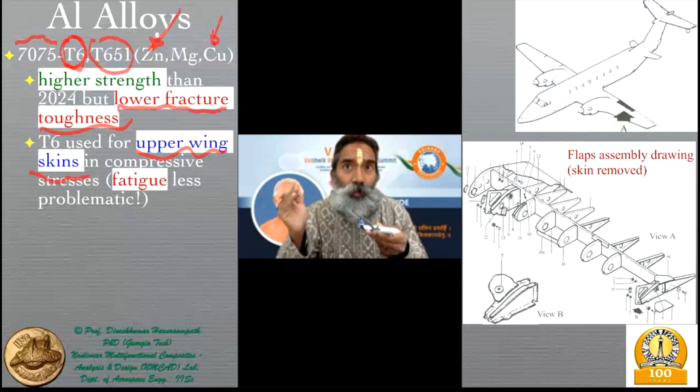You should remember this: for all alloys within a particular primary material class, aluminum alloys typically have around 70 GPa as the elastic modulus, or Young's modulus. Steel alloys would have around 210, titanium alloys around 110, irrespective of what the secondary elements are and how much they are. Yes, there would be a small change, but roughly the same.

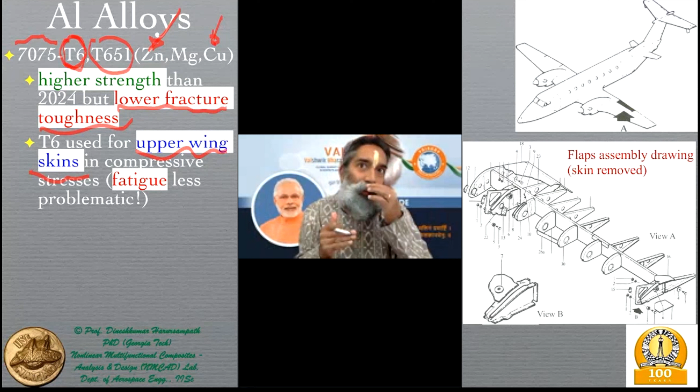But it's the strength which varies a lot. Usually when we try to increase the strength with a particular alloying element, like zinc in the case of the 7000 series, the collateral damage you get in that material is in terms of lower fracture toughness or higher fatigue crack growth rate, etc. So where fatigue is less of a problem, you can use the 7000 series, and it has been used quite extensively.

The other option is of course relatively more recent, but it's again been around for almost one or two decades. Probably in some fighter or military aircraft it has been around even longer than that, but in larger quantities it has predominantly been used especially in the last decade, especially in the Eurofighter Typhoon and also the Airbus A350. They use the lithium alloy much more because it has even more stiffness.

As I said, stiffness usually doesn't increase with the alloying element, so this is an exception where you see the stiffness increase. But there, in the initial stages, people went overboard and used about 2.5% of lithium. Lithium, as you know, in the periodic table is right up front after hydrogen and helium, so it's the lightest metal that you have.

Of course people are trying to look at metallic hydrogen as a possibility, but at room temperature, like mercury, it's also going to be a liquid, so you may not have structural applications, though metallic hydrogen could have certain other applications in terms of conductivity, thermal or electrical, etc., that metals are typically used for. But from a structural point of view, lithium is the lightest element you could have, and even introducing 2.5% of it can bring down the overall density of the aluminum alloy quite a bit.

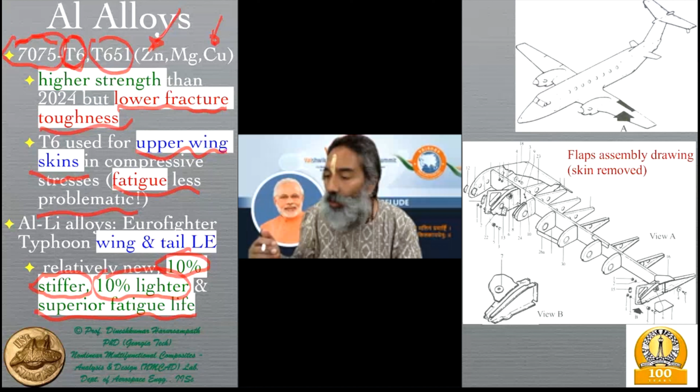But the aluminum lithium alloy has a better fatigue life. So those places where you can't use 7000 series because of its poor fracture and fatigue, you would instead use the aluminum lithium alloy. You can see this in Flight International magazine's website, Flight Global, which shows many cutouts. For more recent aircraft like the A350, you'd see a large percentage of aluminum lithium alloy used even in portions where typically 2024 or 24ST was used, because those areas are under tension mostly and fatigue loading, and aluminum lithium alloy is actually good in fatigue as well.

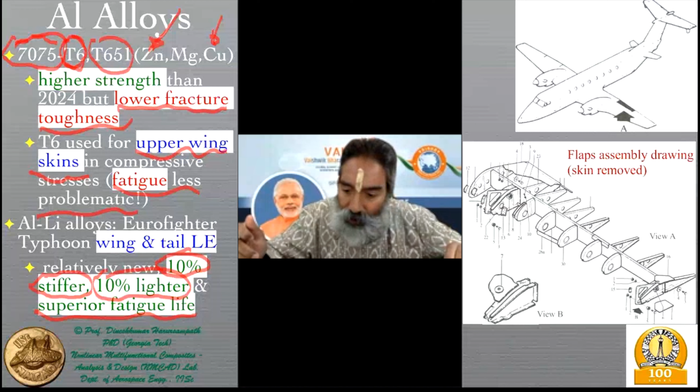So with this, we will conclude the discussion of aluminum alloys on Tuesday's class next week. We will take up the steel alloys and the titanium alloys before looking at composites, and hopefully we would complete that in the next class, and then move on to the introduction to the theory of elasticity.

Only those parts of theory of elasticity which you don't need to unlearn in order to relearn some of the state-of-the-art techniques. So I will also give you, probably on Thursday's class, an introduction to the state-of-the-art without going into too much detail of the equations. I will also in a later class talk about the final set of equations without derivation. Those derivations will be done in the nonlinear mechanics of composite structures course that I'll be teaching next semester. But I will give you the outline.

So those of you who are not going to continue with structures or materials will at least have an understanding of how simple those equations actually are, and why we were dealing with the textbook formula of strength of materials, knowing fully well that the assumptions are not valid, and therefore the accuracy, fidelity, or reliability of those models was so poor. That's why I'm not introducing those, but giving you a flavor of what is essential for an overall understanding, even for non-structural engineers.